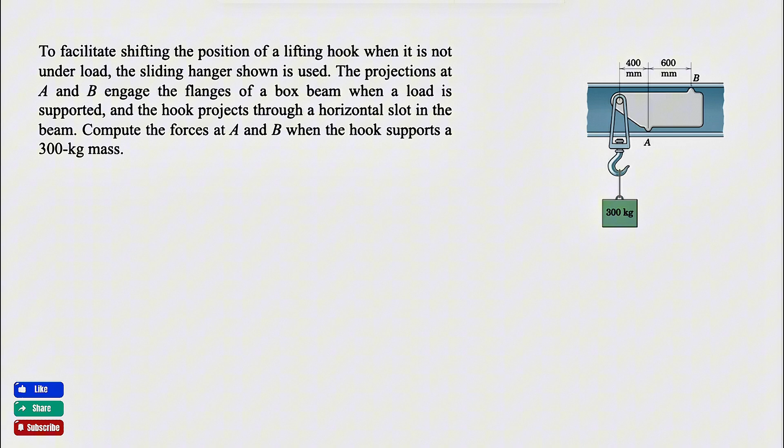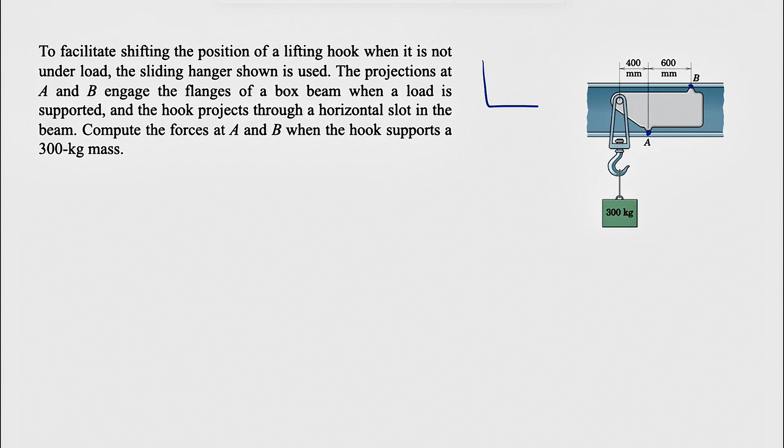And the question is asking us to compute the forces at A and B when the hook supports a 300 kilogram mass. So first of all, we're going to have two reactions at A and B. But we're going to assume that there is no friction at these two supports. So it can freely move in X direction if you just call our X and Y in here.

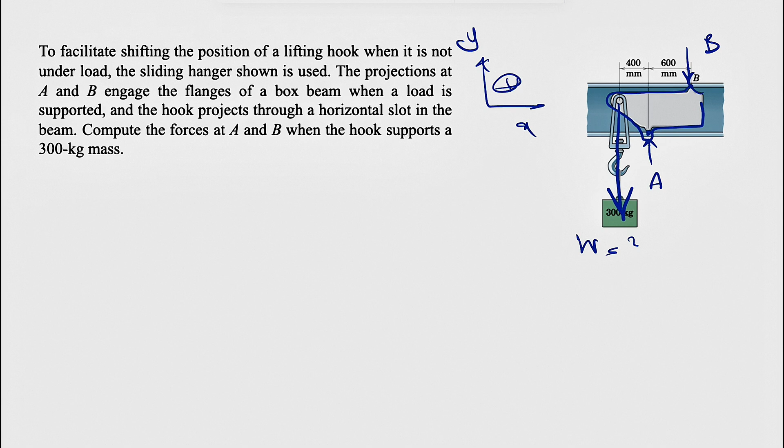So if we just draw the free body diagram for this part, we obviously have the normal force at A and B. And at this point, we have the weight of this 300 kilogram mass. So we're going to have 300 times 9.81, which is our g on Earth, meter per square second. And this is going to give us the force in Newton.

We are in equilibrium. We have three different equations. Sum of all forces in X equals 0. Same for the Y. And we have another equation for the moment, which means we can find up to 3 unknowns in here. But since we don't have any force in X direction, this one is out. And if we just do the sum of all forces in Y, we're going to end up with A and B. So 2 unknowns, and we're going to go with our moment equation about point either A or B, it doesn't matter. Counterclockwise positive as always, and we're going to use the 2D shortcut for finding the moment.

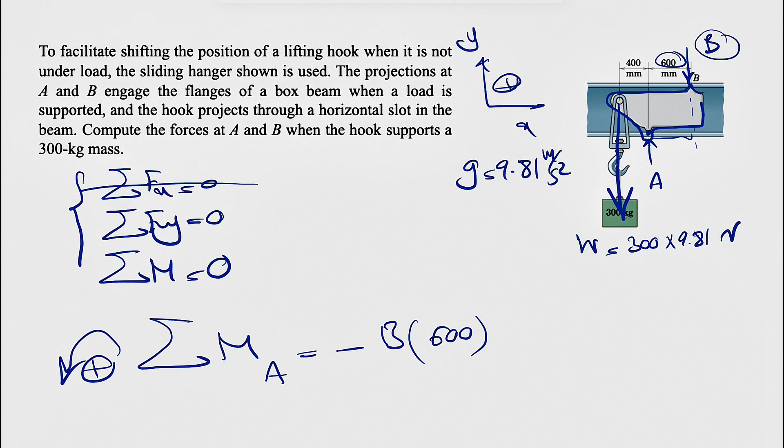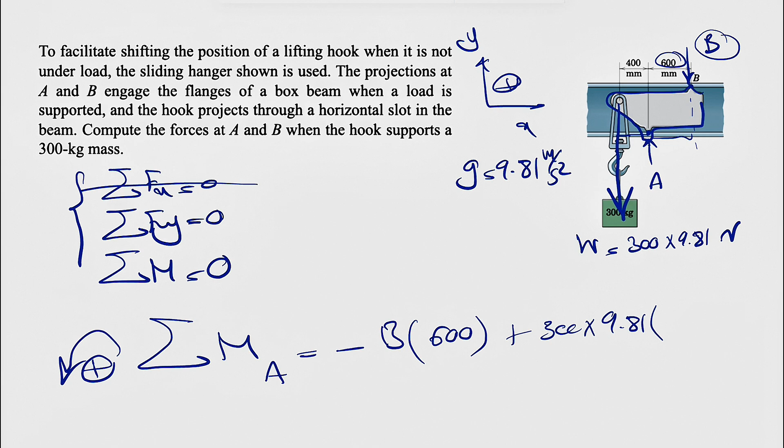We have the moment of B about A, which is a clockwise moment, so negative B times the distance from A, or I should say horizontal distance from A to the line of action, which is 600 millimeter. We can do the unit conversion for the millimeter, but it won't make any difference in here. So we can just leave it as it is. And we're going to have the moment of weight about A, which is counterclockwise, so positive 300 times 9.81, and the distance would be, again, the horizontal distance from A to the line of action, which is 400, and this will be equal to 0.

And that's actually why I didn't do the unit conversion, because if we just divide these by 1000, it won't make any difference. So our B would be basically, we can cancel these actually, 200 times 9.81, which is going to be 1962 newtons, or 1.962 kilonewton.

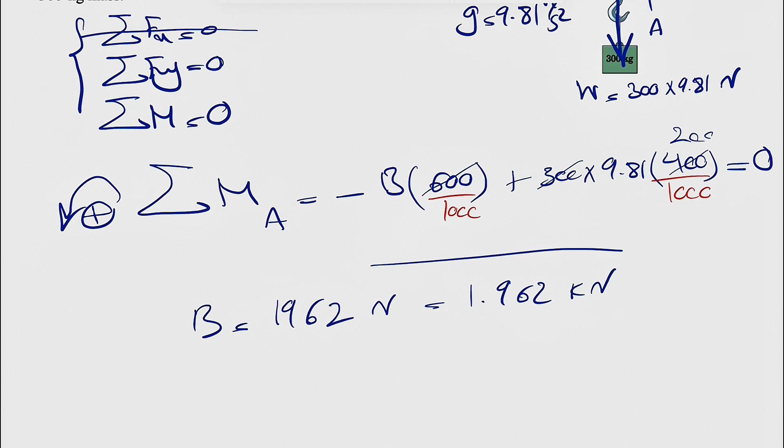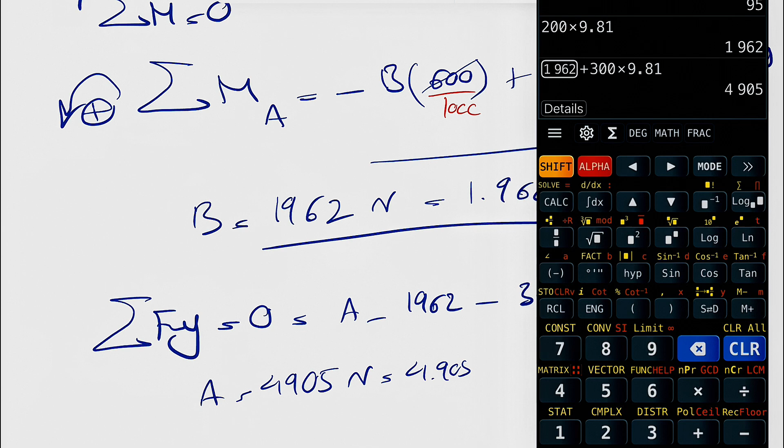That's our B, and we just do the sum of all forces in Y direction. Should be able to find the A. So we're going to have A minus B, 1962, minus the weight, which was 300 times 9.81, equals 0, and just have to add this to 300 times 9.81, and our A will be 4905 Newton, or 4.905 kilonewton. And that's the final answer for this question.